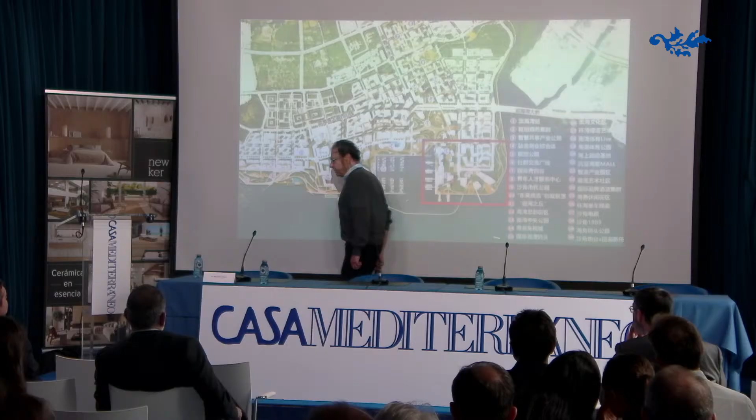Well, this is the site. All this is new, especially this part of the project that goes up there and here. This is a bridge that exists, and this is a master plan, a very generic master plan that is intended to locate 2 million people living there. I think they are crazy. There is a marina with a new ferry terminal that connects with Hong Kong and Shenzhen, etc. A stadium, Olympic stadium, a lot of towers, and a huge, very dense space.

And I don't know if I have a pointer. Is there a pointer? No. I think it's turned off. Well, anyway, you see the red square is the place where they gained land from the water, where they want to plan a cultural district that is more than a cultural district. It's very complex, but it was the focus of the competition. This is the site. The site is water, it's becoming drier and drier, but it's still like water.

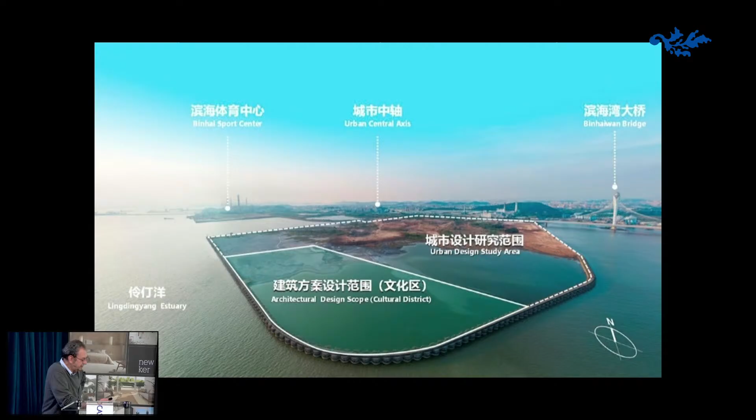Here you see the architectural design scope. This is the cultural district, the urban area. I mean, the bridge is the only thing you can recognize a bit. And well, they are drying it, it's almost finished now. This is the bridge that is, let's say, the most iconic feature.

It's not a kind of nice city, it's very industrial. If you have an aerial view, you only see factories covered with solar panels, photovoltaic panels. And this is the site that they think is the most beautiful, because every Chinese person is in love with sea, water, navigation, etc. There's a lot of fantasies about water in their culture, and this is the only place where the city is, to the right side of this walkway, and this will be the view over the new land.

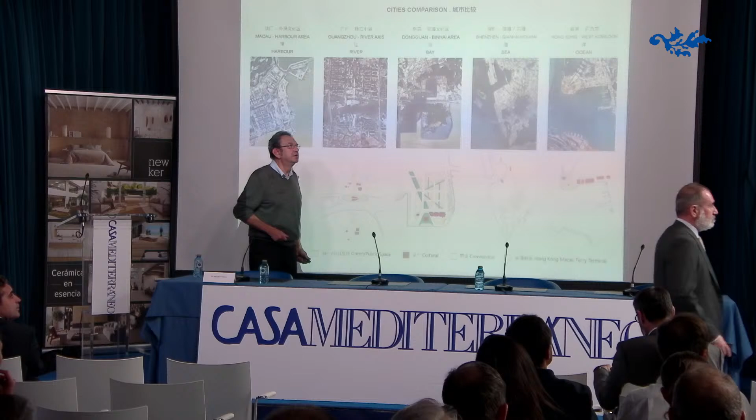Do you mind if we can close only this curtain, only this one? If it is possible, I don't know. Yeah, I think it's better, no?

Thank you. Great. Well, I'm going to explain how we work in this context, which is not the usual thing in Spain. First of all, because of the scale. Second, because of the language. And third, because of many other technical issues. But so, for a comparison of cities, it's very, very simple. We know Macau.

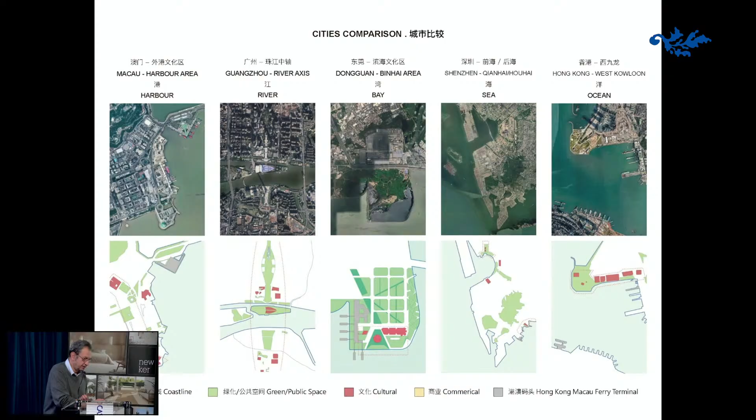We've been working in Macau years ago. We know Guangzhou, we didn't know Dongguan. We knew Shenzhen, and we know very well Hong Kong, the place where normally you have to go when you fly. We were trying to understand the way all these cities have created cultural districts that are also commercial and office spaces, giving a character to each city. So we discovered that ours was much bigger than we understood at first, because we hadn't paid attention to the fact that 2 million people were going to live there.

So our process, the simplest thing, is first of all inspiration. When we read the syllabus of the competition, we knew that water, the sea, was quite important, and there are a lot of fantasies in Chinese tradition in relation to sea and water. They also have the lanterns.

It's too much light here, I think you don't see this well anyway. If we can take out these lights... in the first row it's a pity because the details... I don't know. But the streaming will see nothing anyway, don't worry. We are Spaniards, we adapt to everything.

So, well, there are dragon boats, very similar to Noah's Ark. There are lanterns, traditions and holidays celebrated with floating lights, and sailing boats. The sailing boats were a beautiful invention, more in Hong Kong than other places, and it was how Hong Kong became really rich, beginning commerce of the whole area through these beautiful things. So we thought it was interesting to have some knowledge and understanding of these cultural traditions, because somehow they are much more respectful of them than we are of ours, in general terms.

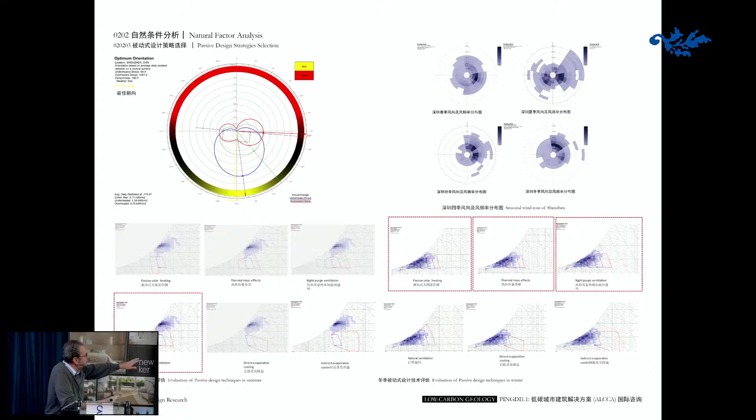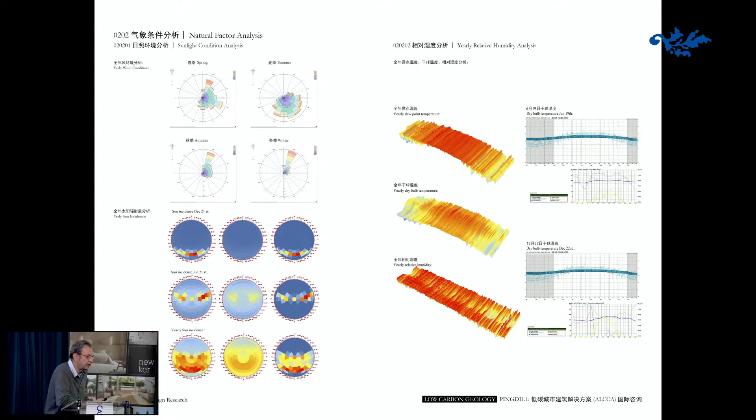But it's not exactly that—if you look, there are some charts. Let me see if I have to... yeah, okay, there are charts for specialists that give recommendations for specific areas and specific moments of the year. So after the inspiration, so to speak, comes the study—to study seriously and consult experts on the techniques needed to create interesting conditions for habitability.

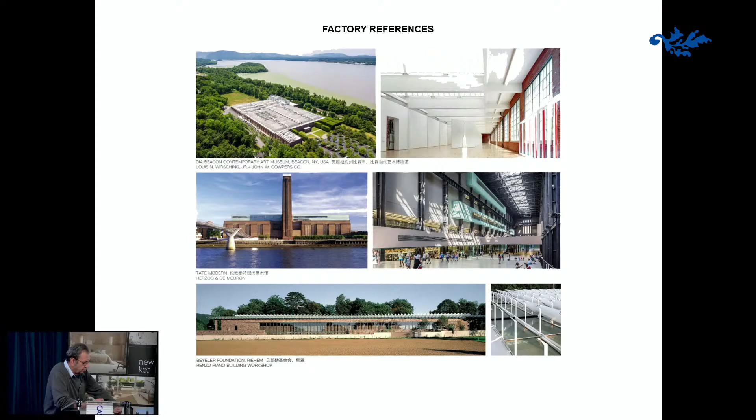And the third thing we thought is, if this is the city of the world with the most factories, and the factory typology has been so transformed in recent decades in the States, but also in Europe, Spain, Italy and many other countries, it has become a typology that is wonderful for cultural activities, museums and exhibitions. There are examples in London, Switzerland, the north of New York, etc., all successful. There is something magic about the scale and free plan of these buildings that we thought could be a kind of homage to the city—to say factories don't need to be so ugly.

So there was a moment we were thinking about the process, trying to explain it quickly. The beginning is always very difficult, because if you make a mistake, then you are lost. We were trying to understand what to do with all these things.

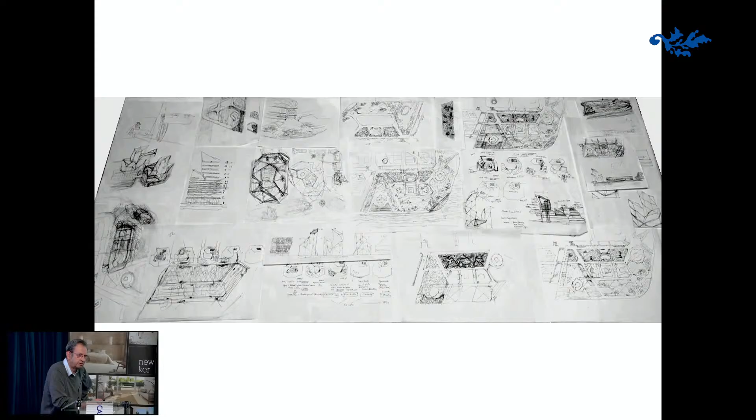Well, I don't know if you see anything here. Anyway, these are thousands of drawings—we basically draw, have a paper and draw, boom, boom, many papers. So we are very traditional in methods. We had like 20 of these tables full of drawings, deciding and discussing. They were easy, very quick tools—you just make drawings, make photos, send them to China. Liu Yisun and Su Chang see them, we have a short conversation, and we continue. So almost every day was like this for 2 months, probably.

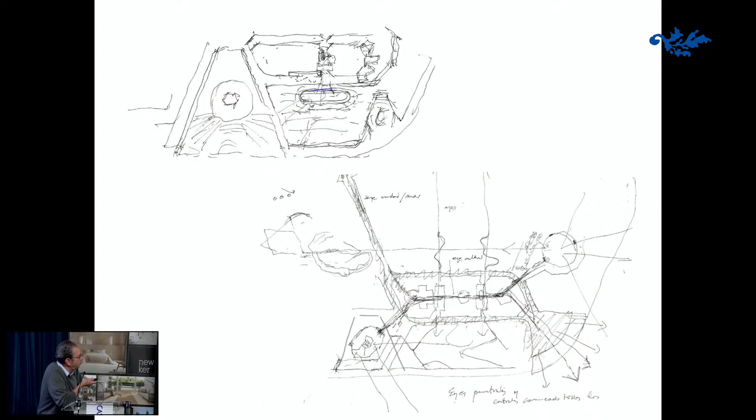We began to have—you don't see anything here—we began to do two organizations, but I prefer to show you this: the site. This is the site we had here to the left. I'm trying to show this—the first one has the terminal of ferries in the sea, a tower, the offices for the terminal, the axis that comes from the whole neighborhood that is planned, and the metro station, which is this kind of circle.

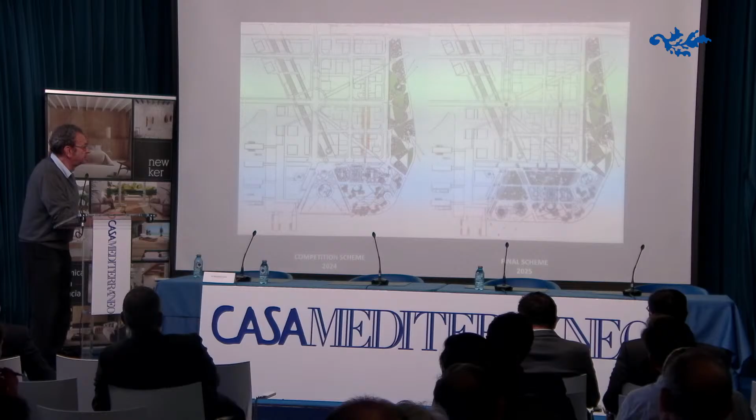And then there are 2 others in this way, and this is the front of the sea. They had a master plan organized for this area, which is the most bureaucratic—offices and residential. They had a master plan that was okay, and they preferred not to touch it too much. That was exactly what they were saying, because they had good people—good urban planners who know what they're doing.

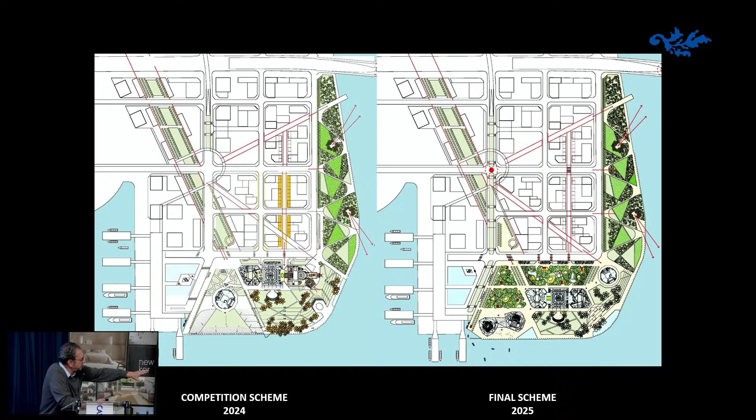So we had some differentiation between the first and the second. But the most important thing, which you probably don't see, is that we chose this scheme: a park and a park, different parks on both sides, and an axis in the middle with a huge library, a lantern, and an icon, as they call it. That's all—it took us about a year, plus a connection to the neighborhood and a connection from the metro to the sea, to the corner of the sea. I think it's easy to understand, but it took us a lot of time and discussions.

And this is the organization that's very close to our final presentation. The ferry terminal is number 1, with the tower—I will explain it.

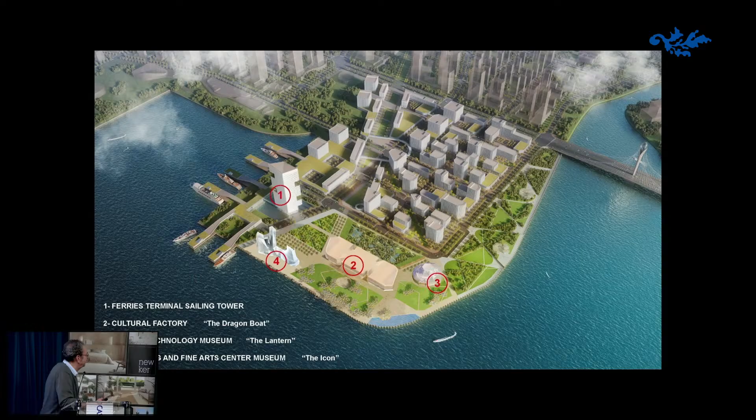The library, the cultural factory, as we call it, or the dragon boat. The science and technology building, number 3, is the lantern. The 4th is the icon, and number 1 is the sailing tower.

So it seems stupid, but finding a way to reduce all the complexities to 4 different buildings made with different materials and for different purposes took us a lot of time, because we had to discuss all these things.

At the beginning, they said it has to be more homogeneous. And we said, no, it has to have different scales, different purposes, different programs. If you make all of them just one big factory, you are destroying the site. So they understood step by step.

And the other thing that was important for us, these are not like nice drawings, but they are very, very efficient.

The other thing that was important for us is that normally in China, everything that is commercial is underground and completely separated from the rest of the programs. So we said, for this climate and for this purpose, the interchange, somehow eliminating the discontinuity among the commercial and the cultural, would give a kind of much better performance.

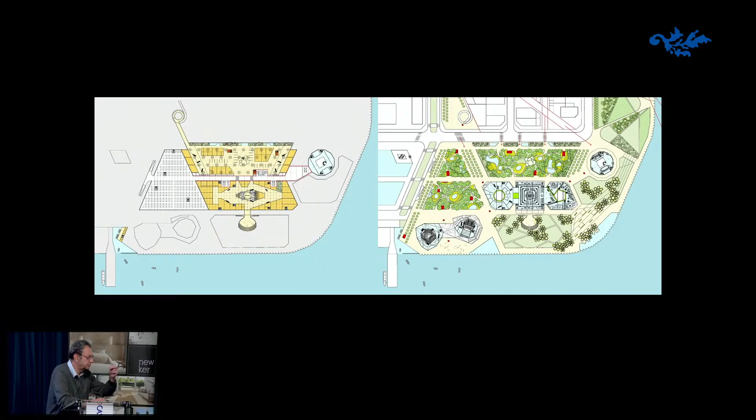In climatic terms, and at the same time it will be much more attractive, because depending on the day or the hour you are using the place, it will be much more interesting to be up or down. And they were okay with that.

So I will begin with the first project. The first project was the ferries terminal and sailing tower, because we thought it was interesting to really try to understand the scales, and it was somehow a way to test our communication with the client.

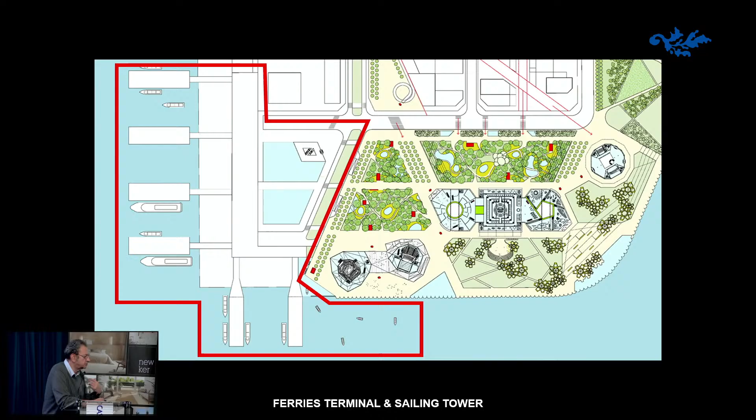I mean, the same geometry, the use of the wind to favor eliminating heat exposition to the sun, etc. So it doesn't mimic literally the industry of the ferries, but in many ways is parallel to that and learns from that.

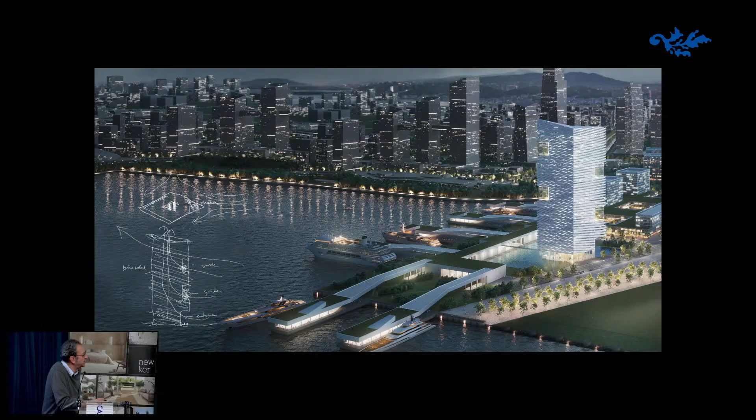And so we made - I'm not going to enter into this, but it was complex - and they liked it a lot, this scheme, because it simplified more than they expected the organization, and I think this is the first thing they are going to build.

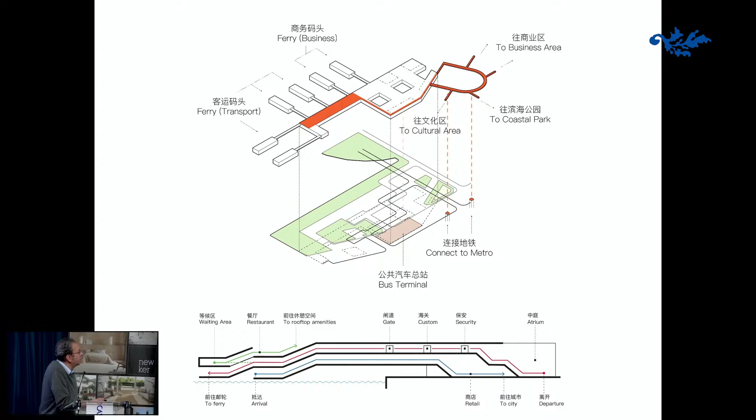And this is the scheme, the first scheme that we made, very simple, for the tower.

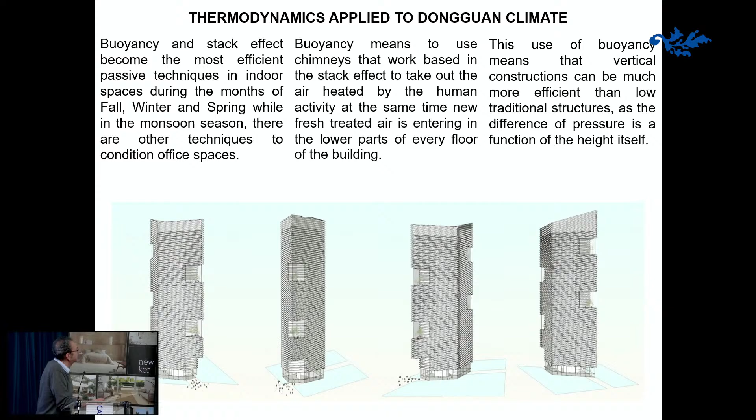And I made this text: buoyancy and stack effect become the most efficient passive techniques in indoor spaces during the months of fall, winter, and spring, while in the monsoon season there are other techniques to condition office spaces. Buoyancy means using chimneys that work based on the stack effect, so the heat goes up, taking out the air heated by human activity.

At the same time, new fresh air, treated air, is entering in the lower parts of every floor of the building through this facade. This use of buoyancy means that vertical constructions can be much more efficient than low traditional structures, as the difference of pressure is a function of the height itself.

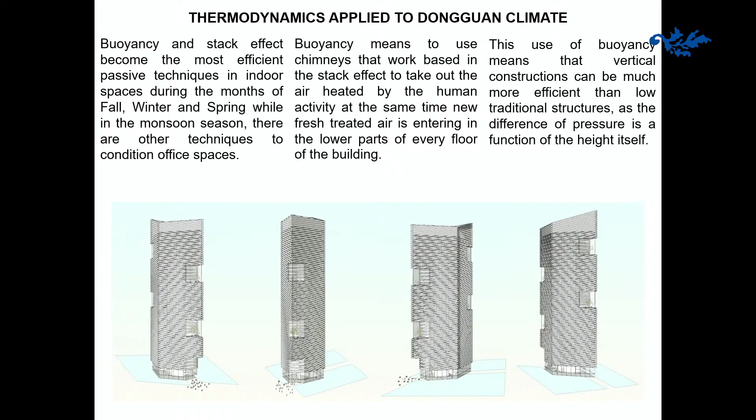Well, sorry. Okay, well, here you see much better, no?

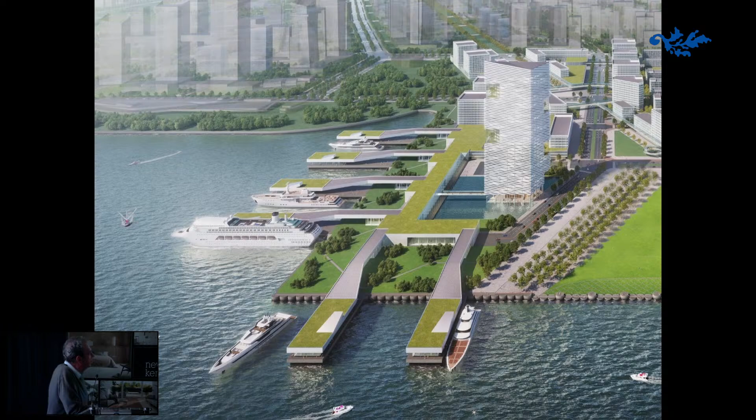Let's say the similarity and the geometry. Even the place where the tower is placed is a kind of water garden. So there is a kind of clear intention of mimicking the relationship of the ferries and the relationship of the tower with the rest of the areas to the north.

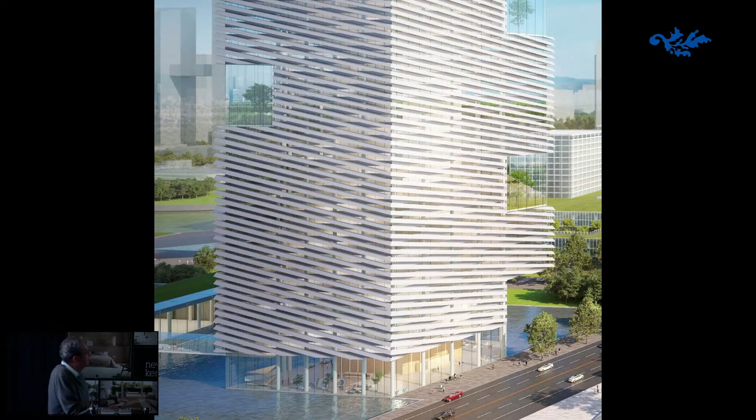This is the detail of the facade, and the ground floor is surrounded by water, and the sky lobbies are also ways to enter fresh air, new air, and create a stack effect to introduce natural ventilation in different weather conditions.

Well, this is the best, the most clear and simple thing that we made, but for us it was very important to resolve first of all what was more practical for the client - the ferries terminal - and the relationship with the sea. When we tested it with them, they liked it a lot.

I think it's the part of the project where they became in love with us somehow. Then we went into the second part, the cultural factory.

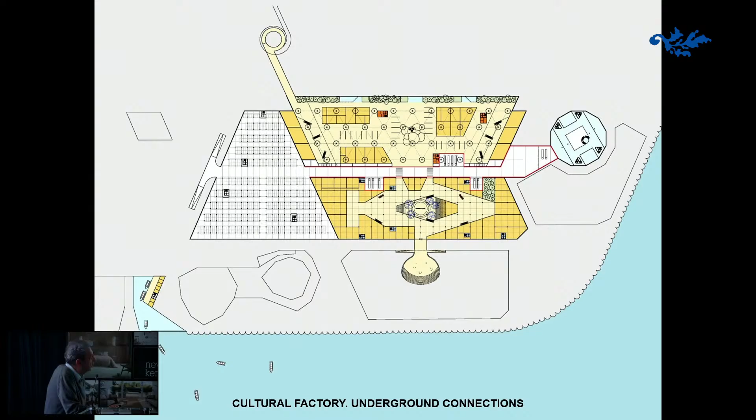I don't know what. I am not touching it. If someone wants, you come here and explain.

Anyway, let's go to the cultural factory, the second and most important part. It was the most obvious complex program, and we decided to put it in the center, and this was key.

But we could invent this kind of pergolas, one connected to the other, creating a structure that is much more static and much more controlled, because the columns are steel beams. So this was, let's say, the way we understood that natural elements were equilibrating artificial elements and vice versa.

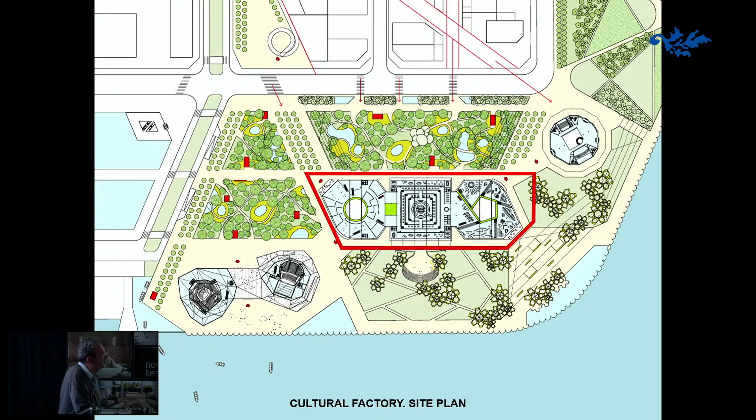And the building in the center is a very simple geometric structure. At the center you have the library, and to the left one part of the building, and to the right another one. The icon, this kind of mesh, the complex mesh, I will explain later on.

This is the cultural factory. Here you see, well, these pergolas create structures that are stable against typhoons, and they were calculated accordingly. I'm not going to bore you with that.

If you need to have this open in different weather conditions, you have to be able to manage all these things, not only for climatic issues, but also for the functioning of the place as a really cultural area.

Yeah, well, I mean, I'm going to be very synthetic. This was worked on for different reasons, especially by Su Chang, one of our colleagues.

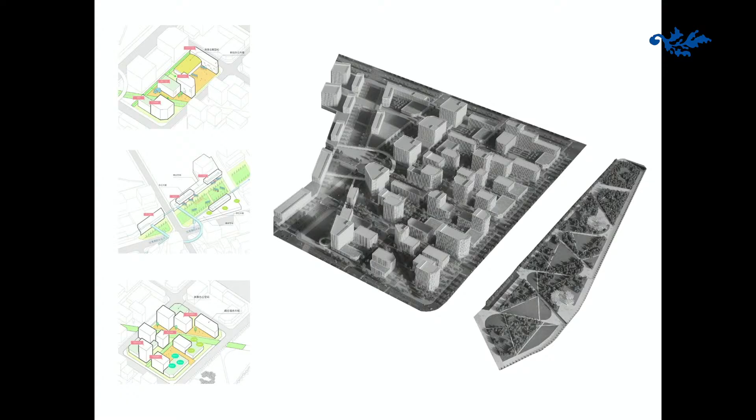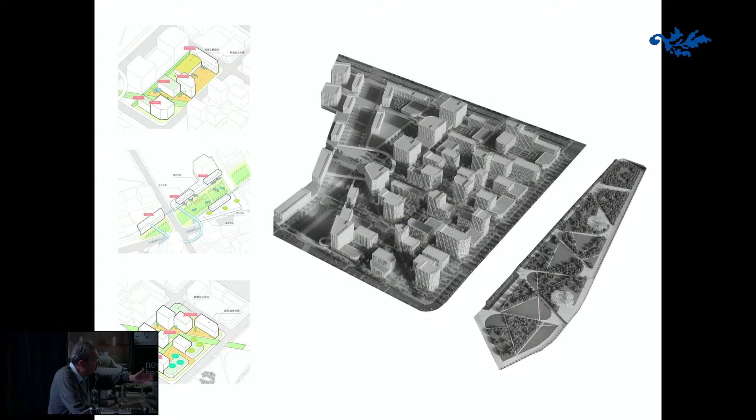Also, the park that is there to the right, separated, that we have just taken out, is connected to all the main streets with this kind of zigzag main path, and has a different character than the north and the south. It's more for jogging, for the elderly, for young kids, etc.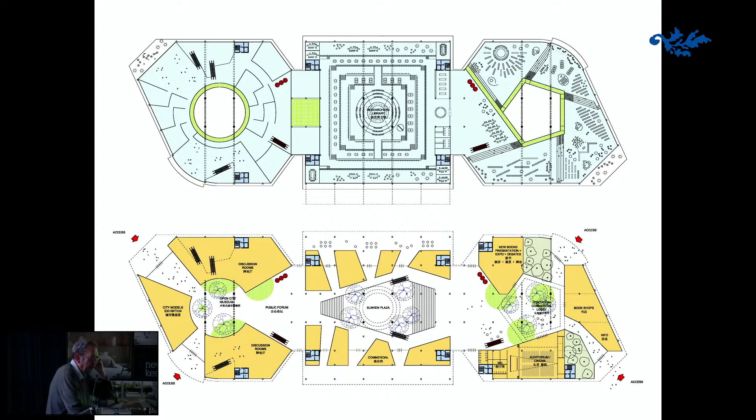It's open for children, for young kids, for seniors, for couples, for whatever, tourists, locals. It was a kind of capacity so the whole idea was wherever the climate is, every single day of the year, you can spend a wonderful, complete day there, alone, in couples, with family, with children, with whatever. So it's a kind of exercise that is quite complex.

And this is more or less the one fragment, the fragment of the cultural factory and this other Pentagon area. You always have these streets that connect north and south.

And obviously we have, these are aluminium. They are the kings of aluminium in China, so they had to have aluminium. It's expanded aluminium, and it was an invention of Matthias Schuler, the Transsolar.

It moves, it can be, I mean it pivots, depending on the sun, a bit. Not that much, it's not like a crazy thing. It pivots a little bit in order to really create comfort along the day and the different seasons.

Well, yeah, and we have also some... Well, I'm going to pass to the next.

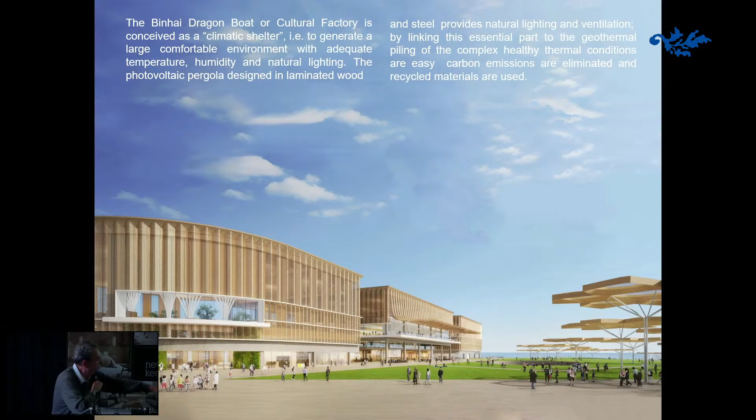I cannot read, but here is how you can appreciate the scale. The entrance is not only in the corridors that crisscross the building, but also in front, in every corner, and you have some balconies.

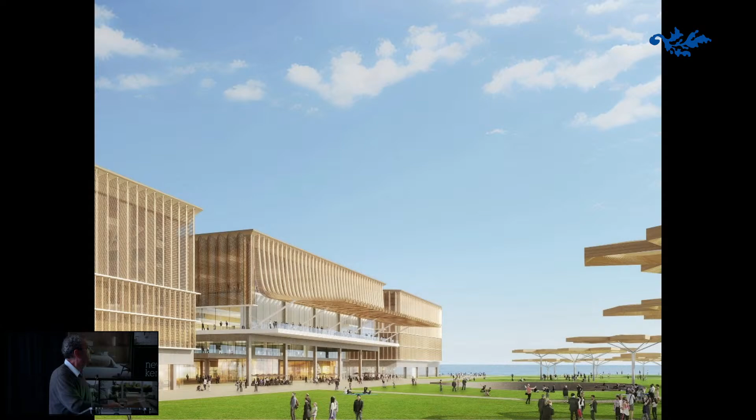Obviously it's very transparent, with commercial areas down and up, but the main space is the cultural factory, and it has a gesture: creating a kind of huge balcony, with a scenario down in the park, so you can have many connections among the park, the library, etc.

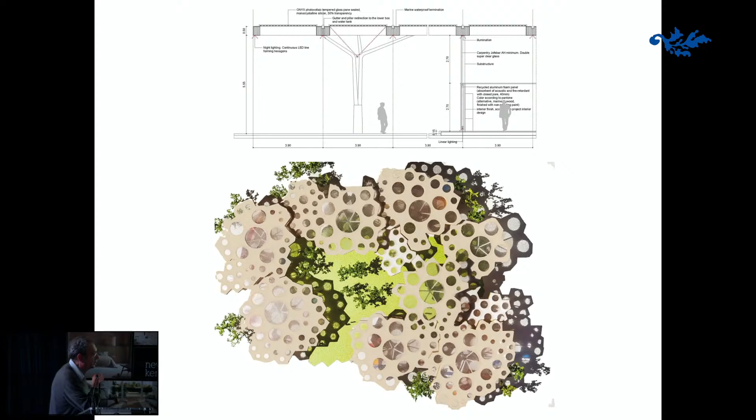These are the pergolas. It's wood, steel, and photovoltaics. They are very simple, they give shadow, and they really create a sense of scale, while the rest is really big. These are like conventional pergolas and could be in a park in Spain. I mean, they don't need to be monumental at all.

So all these elements, you see in the columns in the upper section that create this form, they come from the juncos, which is the way books were invented in China, have come to us nowadays. The whole idea was that the cultural factory had to have, in some moment, a kind of symbol of the Chinese authority about books, in history. They liked it a lot, by the way.

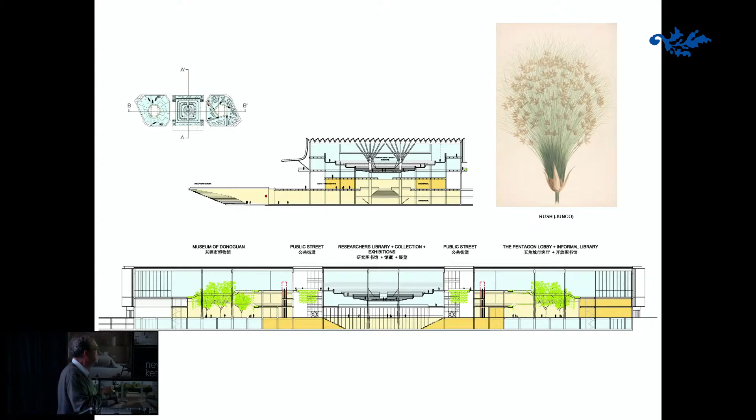And well, this is our sections. I'm not going to try to bore you with details. Let's go to the most interesting part.

This is the roof, a kind of bioclimatic roof, very carefully designed with the engineers we were working with. But it is an homage to Fisac in reality. Those of you who know who Fisac is will immediately see the huesos, the bones that he invented in concrete, this kind of V-shape.

Cover that we transformed a little bit. It has a bigger side to the south than to the north. The south side has photovoltaic cells, the north one has ventilation, natural ventilation.

And the beam, the structure, is a composite of wood and steel. The rounded, circular shape is steel that collects the water, and also the V-shape is steel, so it creates a beam. With this form you can establish a place that always has natural light from the north and natural ventilation, as you will see now.

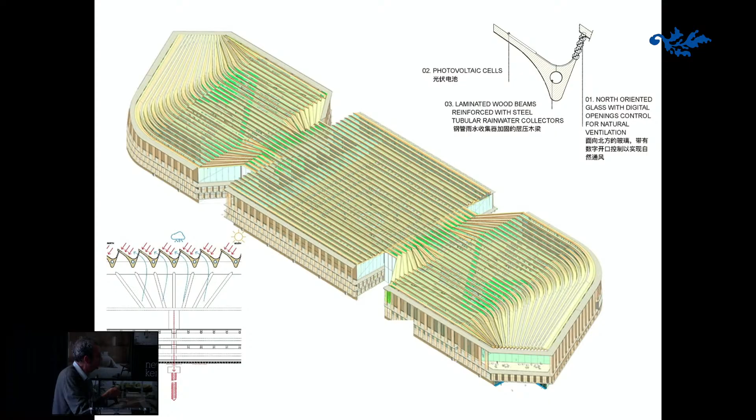It's super simple, but this is what makes it quite interesting for us, and they were really surprised.

We have the pilotis going down into the earth, like 20 meters, I don't remember exactly, until the earth is at 17 degrees practically the whole year. They are connected with the photovoltaics, and they create a system that, at 10 meters, is stabilized at 17 Celsius degrees.

Boreholes are commonly filled with a bentonite grout surrounding the pipes to provide a geothermal connection to the surrounding soil and to improve heat transfer. In heating mode, which is very interesting, the ground energy is transferred into a heat pump which supplies the radiant system in the floor. In cooling mode, since the ground temperature is almost similar to the radiant system supply side temperature, the reversible heat pump is bypassed. The system then operates in free cooling.

So this means that the whole structure has the responsibility of the comfort of the whole place. It controls the temperature, controls the light. There are practically no heat gains for light because we have natural light, etc.

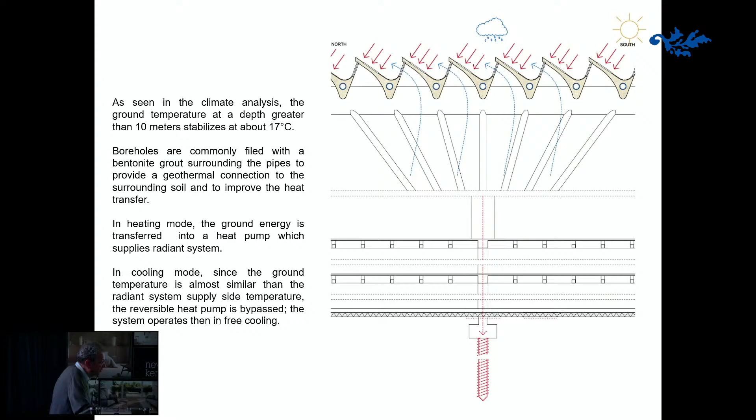So this was a surprise for them, because we studied our enemies. Our enemies were like, well, MVRDV, Snøhetta, Lundgaard & Tranberg, and Urbanus. I think five studios, all well known.

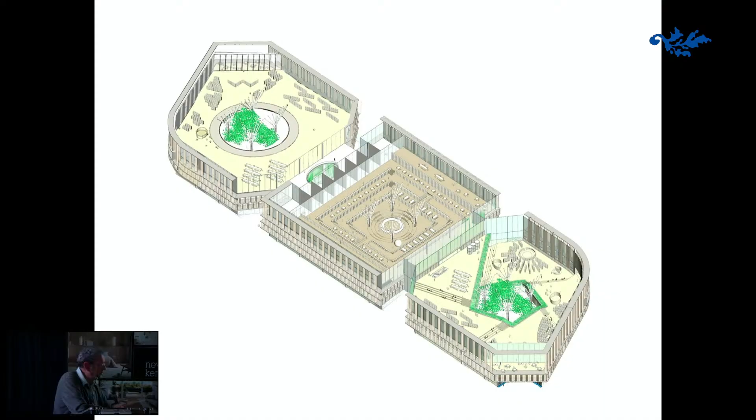It has to be square, and it has to be rational. No country can accept more libraries like this, spending a lot of money for these things. So this is what we were basically proposing: 3 buildings connected and interconnected on different floors, down in the earth and up there, with a central space. Maybe you see this better, and you see how the Pentagon has different levels. It's a kind of giant stair that creates different series of spaces.

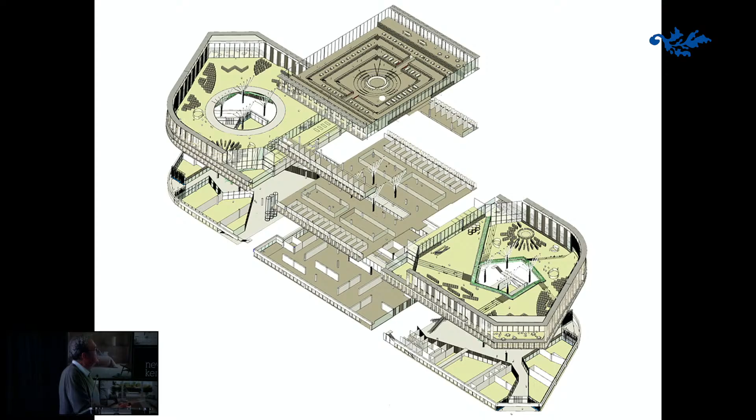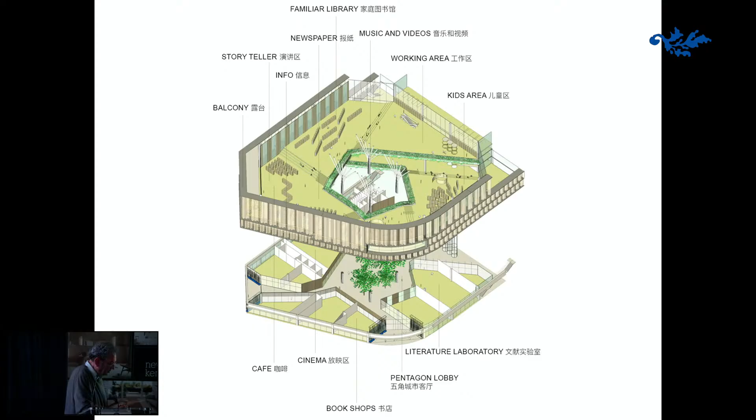Well, you can see, this is an example, the only one I have brought. Cafe, cinema, literature laboratory, bookshops, balconies, storytelling, newspapers, familiar library, music and videos, working area, kids area, etc. So it's a place that is conditioned naturally and at the same time has a diversity of environments, and this is the image of the environment inside.

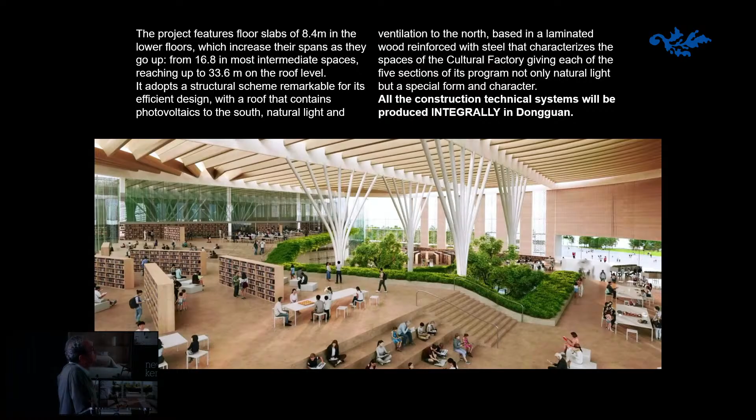All the last part of the paragraph is very important. All the construction technical systems will be produced integrally in Dongguan. We were studying which materials they really are experts in and like, and which are cheap there, etc. So it was important for us to say that we knew it had to be like this.

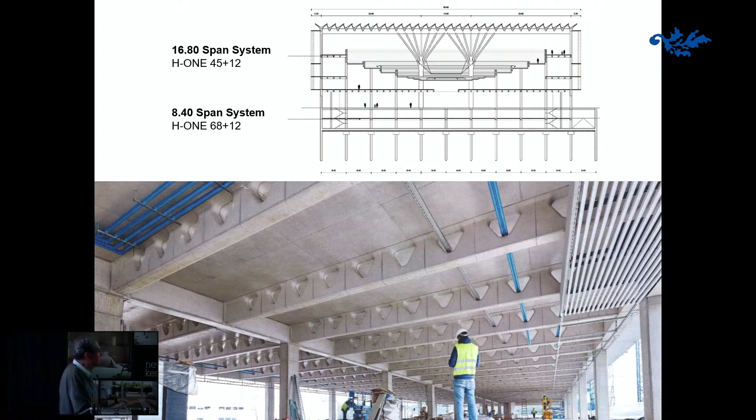And this is the effect of the space, and this is inside the library, square, super square, with this beautiful system invented by a Spanish architect, by the way, Holedeck, that can really compete in terms of decarbonization with wood. It's an amazing invention. The Holedeck has holes everywhere where you can put a hole in concrete. It's like this. The scaffolding system has these pieces, and you have all these. It's a kind of triangular shape made in concrete.

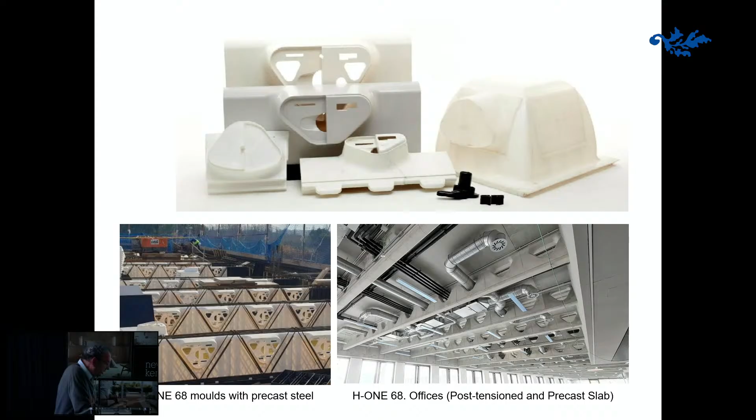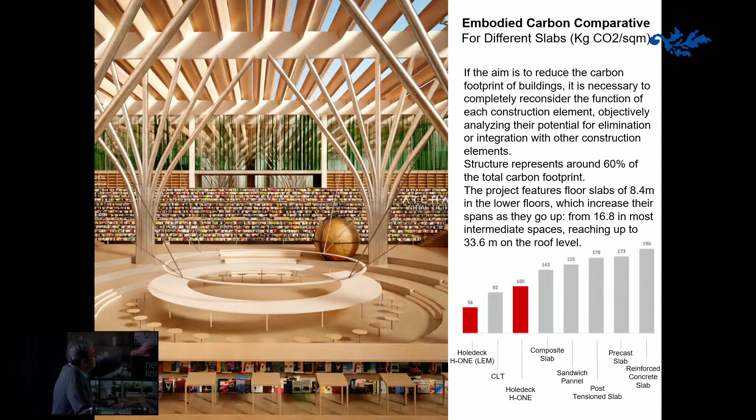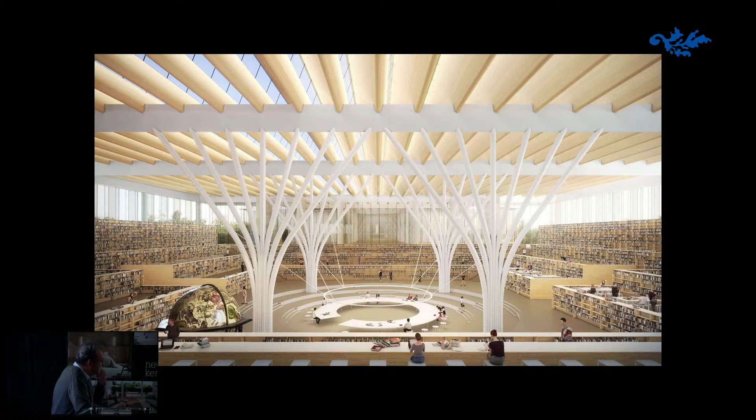He has an incredible mind, and this is more or less the image that we were trying to create. In the different environments, this is the environment that is the spiral, the other is the square, and the other is more central. This is the most important part, and they really appreciated the rationality and at the same time the monumentality. It's very traditional. It's the archetype of the library.

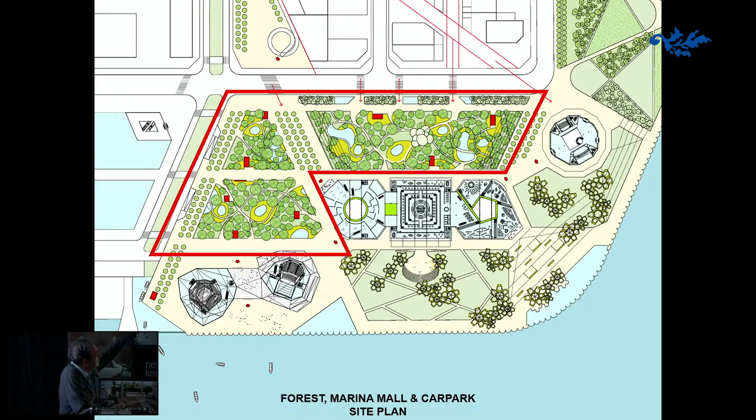And then, I'm beginning to finish. Don't worry. The forest, the forest - well, we drew it in one night. We don't care so much about the details; it was not important to design it in detail. The thing is that we wanted to create a kind of forest that creates shadows and spaces for children. They are close to the neighborhood where the residential units are. And below this part, you have the more commercial areas and the car park, and all the elements we have to put together.

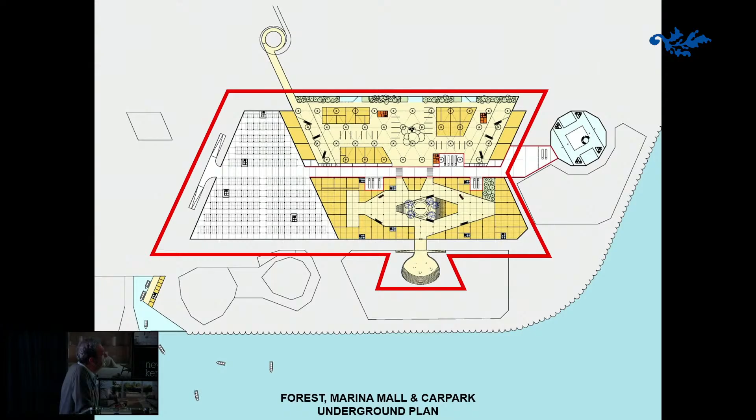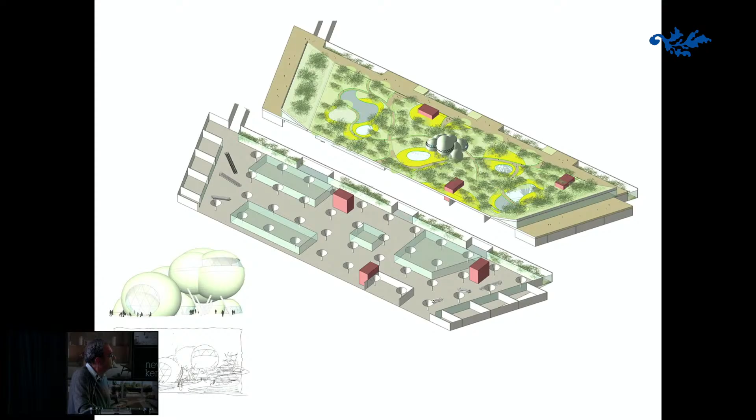So the site plan, I think, is the basic scheme. Everything tries to be located in the best place, easy to organize and easy to use. The shopping mall, created under the forest, has this big span, and it's very multi-use. It's thought to have restaurants, commercial space, pharmacies, everything for the neighborhood. But at the same time, we wanted places for children - these bubbles, you don't see them very well. The green bubbles are a kind of place for children to enjoy and have a controlled environment. You see it here, it's very simple. And it has natural light - all the green stuff is natural light.

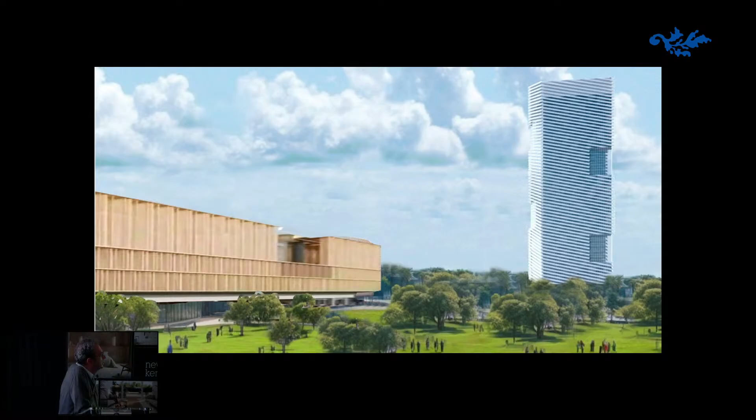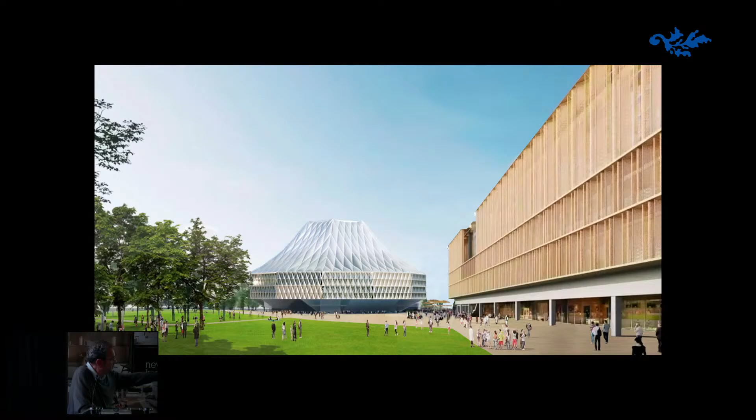And these are the views of the forest, with the cultural factory and the sailing tower. And looking to the other side is the science museum, which is the lantern or the lighthouse, depending on which kind of metaphor you want to use.

And there is also - yes, I'm finishing - this thing is almost stupid, but very important. We understood that the love for the traditional sailing boats, the Chinese traditional sailing boats, of the people on the jury was really important. So we decided to create a kind of little port, protected with barriers etc., to have a touristic opportunity to be floating in the sea. It's a kind of touristic thing. They liked it a lot.

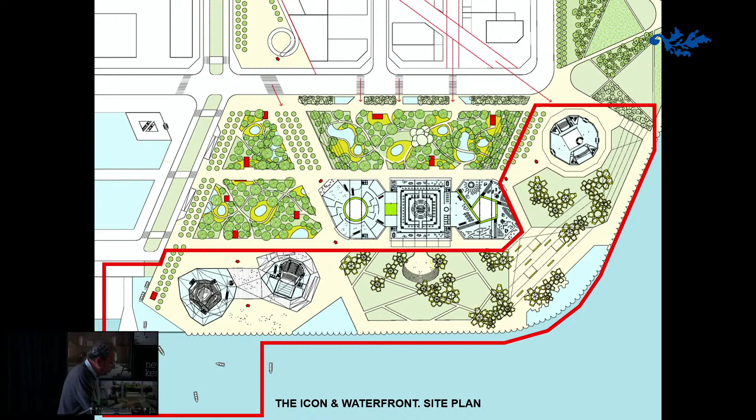That, well, but they wanted, especially the mayor, I was obsessed with the icon. The icon is these two volumes, strange volumes that are there.

I mean, they need these metaphors - it's not like they are. In Europe, especially north of Europe, metaphors are like ugly. People want abstraction. But they want a kind of clues that let them relate with other things - the structures, building structures with other kind of traditions.

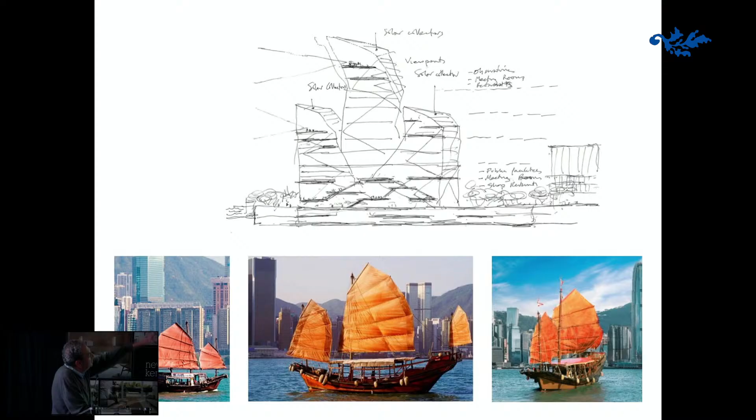Well, anyway, with this we began to test the volume, the height, and the geometry of a possible construction that could mimic the position of the wings of the boats, etc. And this was one first attempt.

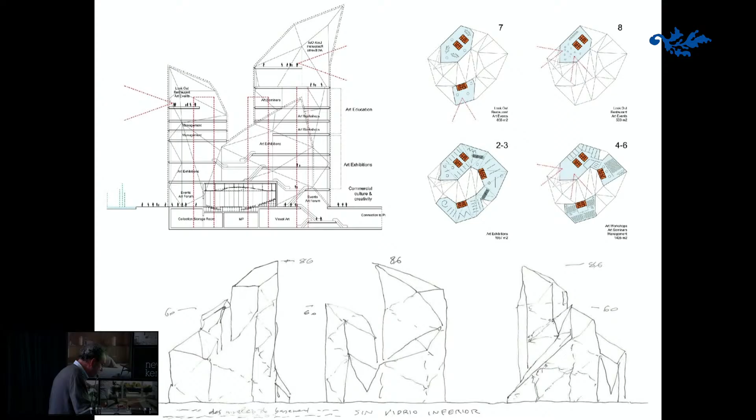When we made this first attempt, we thought in creating a kind of model. This is the hand. This looks to the south. This is the space. The icon is two different volumes creating a frame to look at the sea.

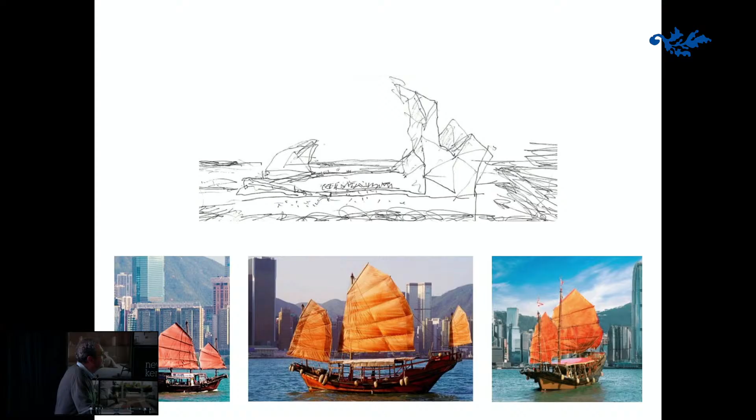And it's a very bad drawing made in the last minute of a night of work, but we knew that it was our shape.

And so we made a model and created several models to really create something that could be seen, that could be read as a metaphor of the waves, of the sailing boats, of the city, the way it looks, and the typhoons - how it defends from the typhoons, etc.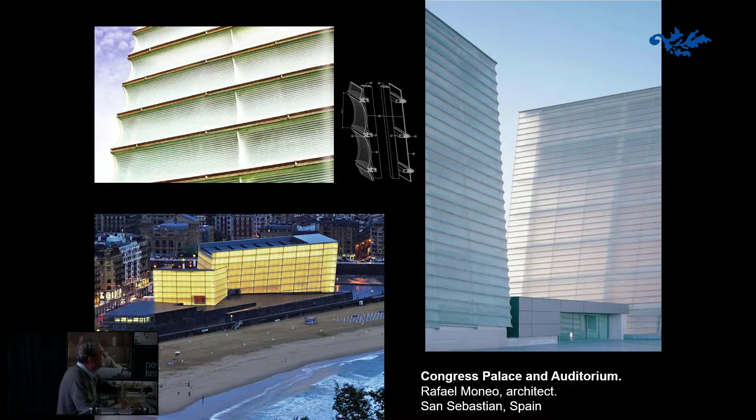And we discovered after doing all this that the materiality had to be completely different. I mean, seriously - you are against typhoons, you are against wind, you are against hot weather. So it needed to be exactly like the Moneo, completely enclosed and molded glass.

I mean, it was - by the way, I was born in this house, so I had it in front of me all my life. It's almost a joke.

And yeah, this is the section that we made. It's the same, it's a kind of translation, that has different theater.

Well, it has like three elements - multifunctional parts, and then it has a part that is dedicated to art, and another one dedicated to operas and theaters.

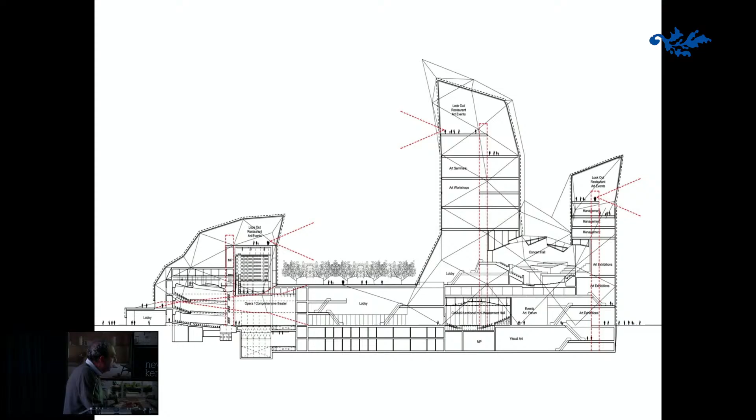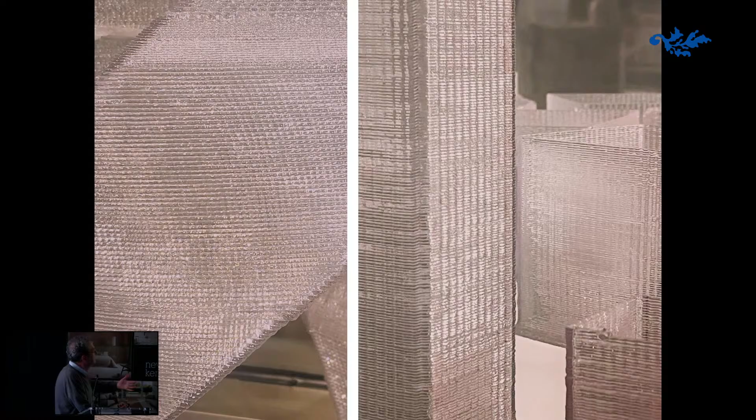Oh, you don't see anything here, I think. Anyway, these are - we were testing in a laboratory in France, different corrugation of the glass, molded glass, to show that we were serious about this. The different techniques - it can have a lot of variations and can be really interesting.

So this was one of the first images that we were able to produce that they began to like, and they could accept that this was a metaphor of a sailing boat, which was really the problem - enough metaphoric, you know.

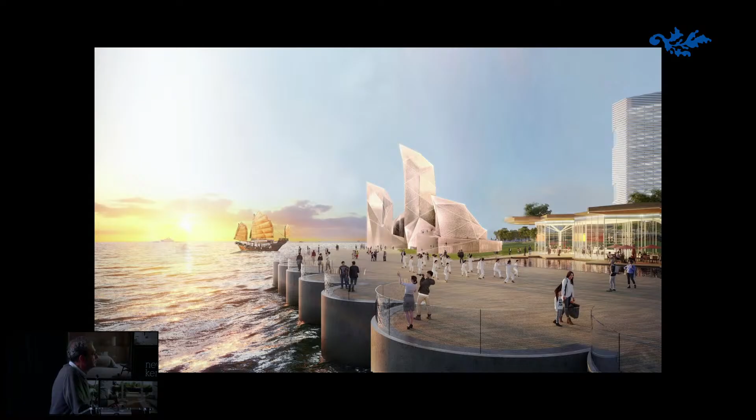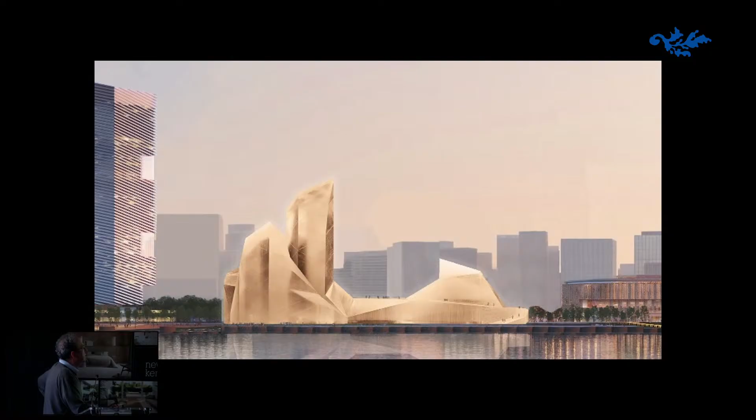And this is another - here we have the boat, the icon, the pergola, the tower, and the sea. And this is, let's say, the frontal view of the icon with the tower and the library.

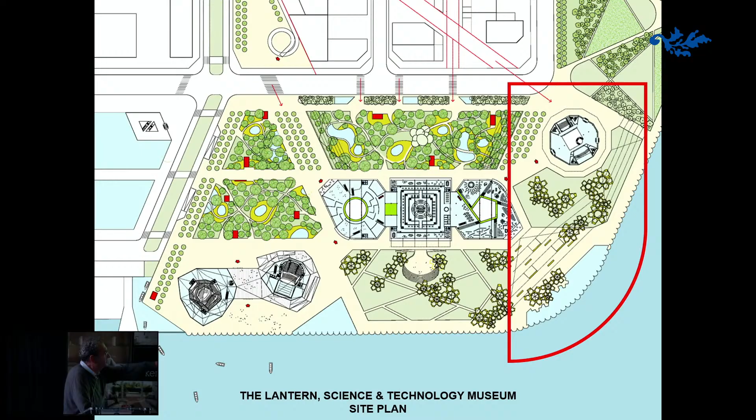And we have only just one thing, the lantern that came from here. At the beginning, it was just here, and it was double size, and we just decided that it had to be more dedicated to children, technology for children, so to speak, and made it easy to deal with.

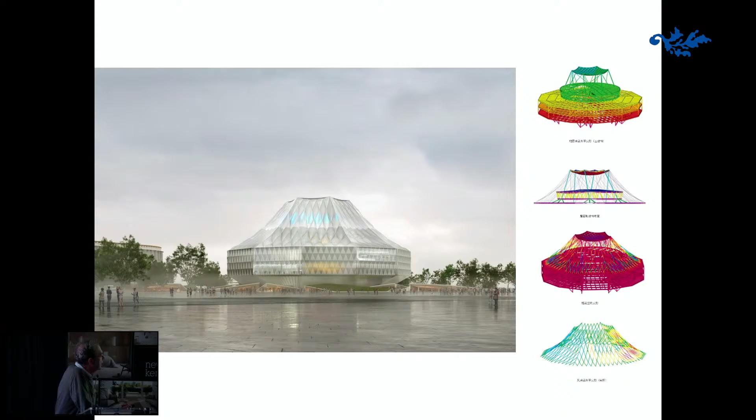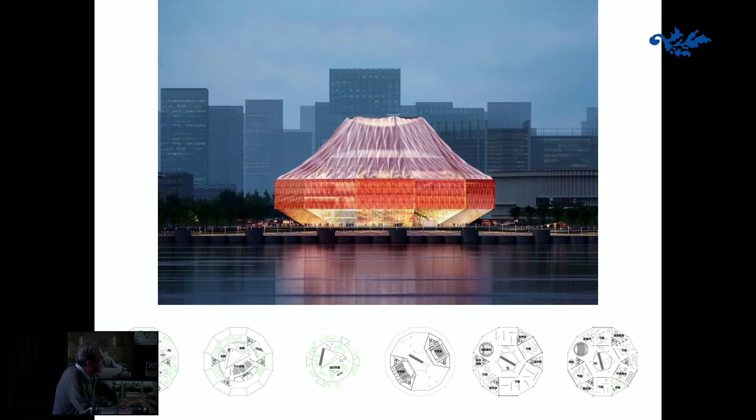And well, this is the geometry and the shape. These are pergolas that are giant, for restaurants, matrimonies, celebrations, etc. And well, the vision at night.

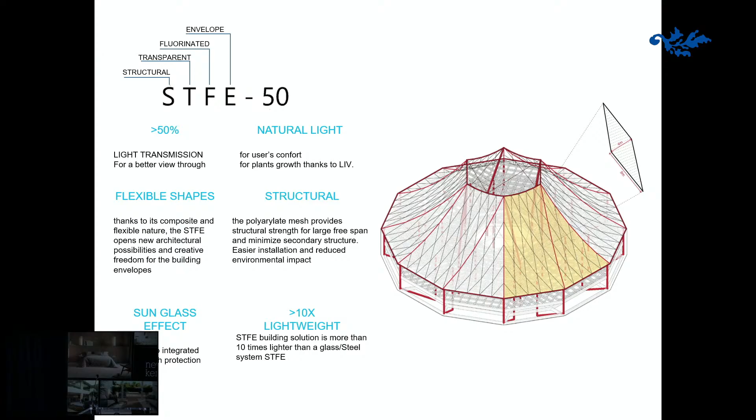Well, the end is sad in the sense that we have won, we have had to pass like 3 important exams. We are very happy to leave down Snøhetta and MVRDV. Just to compare, we are 12 in the office, and Snøhetta has only in Hong Kong 250 people.

So you understand now why we were happy. David and Goliath, no? And the same happens with MVRDV, they couldn't understand what they were asking. The client was asking, and we are now. Urbanus is out also, a studio in Hong Kong. You look at their work and it looks like Catalan work, very Mediterranean, very elegant, but they didn't have the kind of drama or symbolism that was being asked for.

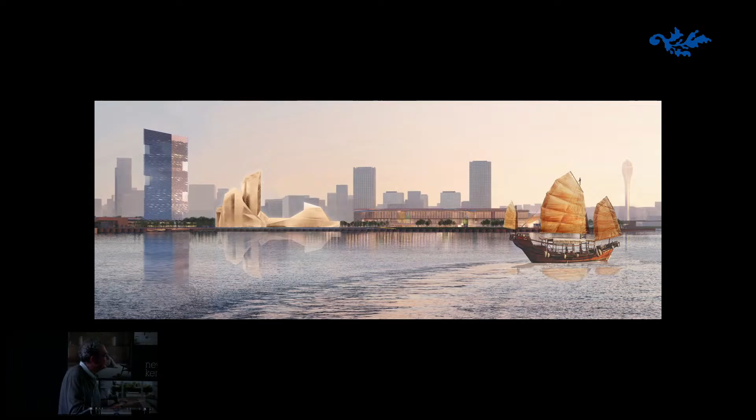So here, with this image, I will finish my lecture. I think that you enjoyed seeing that at least there are countries where big scales are treated carefully, and they really respect traditions. They want innovation, they want construction, they want some symbolic role for the architecture, and not just square meters. Thank you very much.

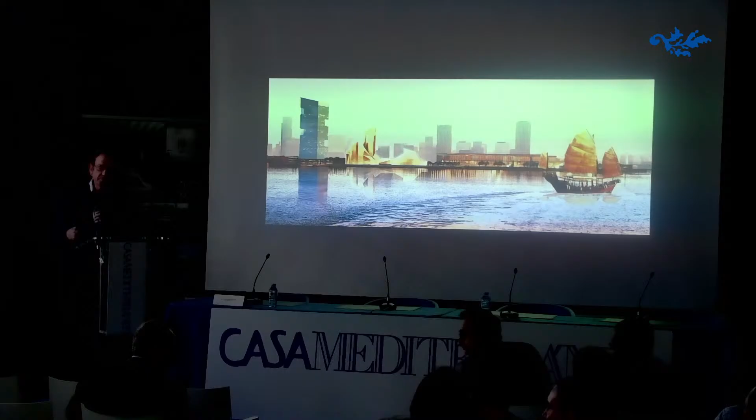I don't know if you are going to ask things or whatever.